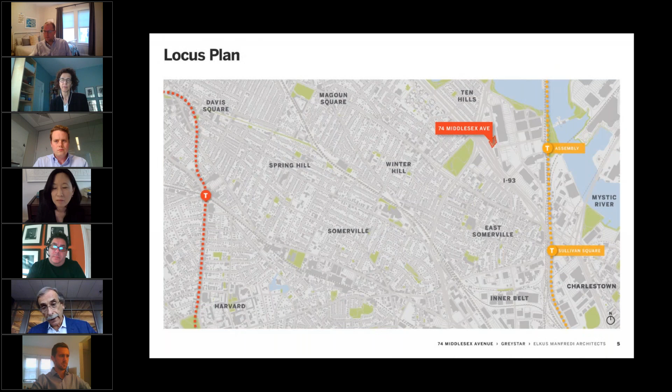I think you're all familiar with the site. 74 Middlesex Avenue is located in the Assembly Square Master Plan District, between Middlesex Avenue and I-93, on a site that is largely empty today with one small building. We believe it's an absolutely pivotal location in the heart of what continues to become a really quite exceptional new mixed-use district, a transit-oriented district, a prototype for work like this around the country.

You can see its proximity to the MBTA station, its proximity to East Somerville by access underneath I-93, and the advantages the site has in terms of visibility from 93, accessibility on Middlesex, as well as the opportunity to develop a front yard, a front lawn, a front park that will allow the building to present itself, but also to be a kind of convening space for the life science industry in Somerville.

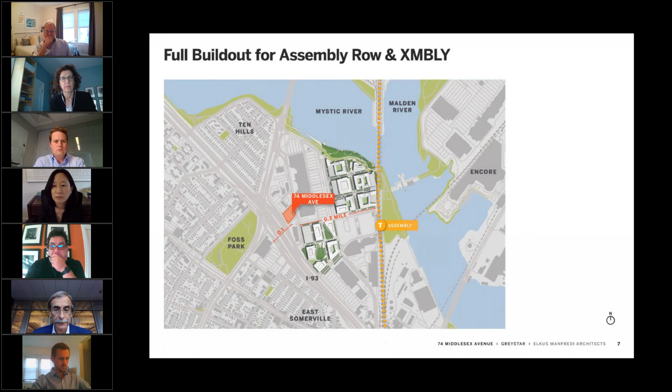We have studied our planning decisions in the context of Assembly Row, but also in the context of future proposed development that surrounds us. The advent of urban planning throughout this part of the city is transformational in terms of walkability, streetscape, and ground floor uses, and you'll see as we walk through the building that we've followed those same urban principles for transit-oriented design.

Giving you a little more context, you can see the 6-minute walk to the Assembly T station, and the 2-minute walk under I-93 that gets you to East Somerville on a site that...

David, this is Sarah Lewis. Because this is all to do with the master plan, which has already been approved, can I ask that you move through this quickly and get to the building and the civic space in more detail? Absolutely, absolutely. Thank you. You know where you are.

And so I won't belabor any of these connections. We are shaped by our context and the environment. So let's get to the building.

I'll start with the site. You can see the property line in a red dashed line, and you can see the civic space that Mikyoung will address, which spans both the public way and the private holding of the site itself, but will be designed as a single idea. I won't belabor these — you know the site, you know the importance of the connections, and you know what's on the site today.

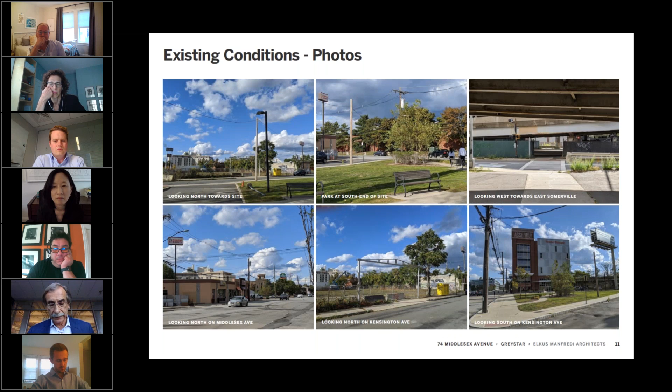So part one is the building, and the building proposal we're going to show you tonight is subject to the Assembly Square Mixed Use District. It's subject to the high-rise lab building requirements, and obviously subject to the requirements of public realm, specifically civic space.

Very simple comparison on the left, of the Assembly Square Mixed Use District Master Plan special permit decision that was the previous proponent — you can see that in column 3 from the left — and then adjacent to it, the proposed project.

I don't think there are any surprises here. There's no change in the lot area. The open space — none is required, 20% is provided. The civic space is 26%, and complies with the requirement. The floor area ratio is reduced from the previous project, and the overall building height is reduced from the previous project as well.

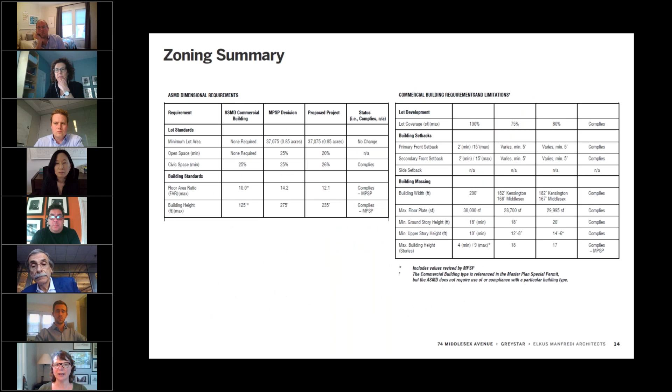If I may, just for the commission's edification, this project wouldn't be here if it weren't zoning compliant this evening. So I'm hoping we don't need to linger on the zoning compliance part of it as a discussion point.

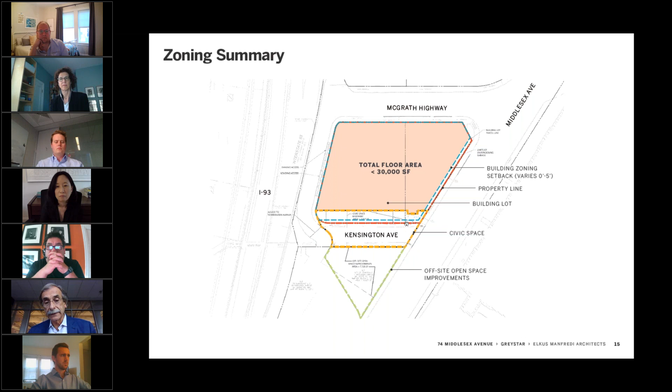We are located on Middlesex, between Middlesex Avenue and I-93, between McGrath Highway and Kensington Avenue. You can see the outline of the civic space, and the total floor area of the floor plates is less than 30,000 square feet. You can see where the building and property line coincide on the north and west, and we are within the property line on the east and south.

We'll start with massing options. You're looking at drawings we created almost half a year ago, studying massing options. I wanted to show you the original sketches that evolved into a series of conceptual designs.

The site footprint has 2 parallel sides and 2 non-parallel sides—north and south are parallel, east and west are not. This is a lab building, and the metrics of lab I'll discuss as we go through the floor plans, but functionally it has a center core, and optimally largely column-free space from that core to the perimeter. Multi-tenanted lab buildings rely on flexibility and diversity of different tenants and users.

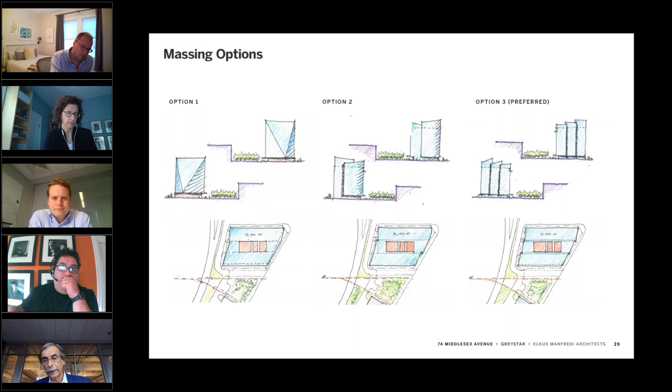So here are the 3 massing options as they evolved over time. You can see, looking to the southwest corner of the building, I-93 in the foreground along with the park space. That first option, which I've called chiseled.

The second option is a 2-part composition made up of gently curved spaces on the east and west, and the 3-part composition follows the geometry of the site while locking the massing into the footprint of the building, lifting it up 2 stories and separating ourselves visually from I-93.

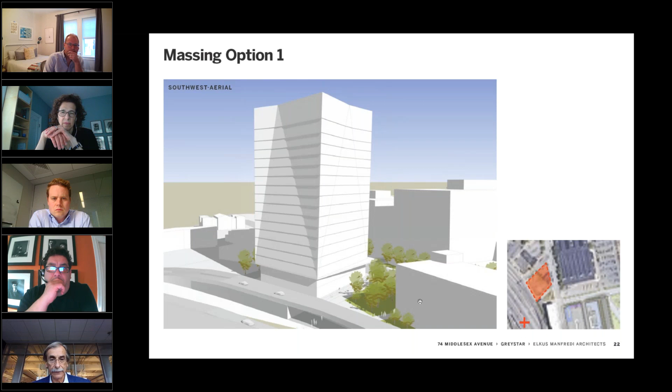I'll quickly show you a series of views of each of these 3 options. Option number 1 from the southeast with Middlesex in the foreground, option 1 from the southwest, and looking across I-93 with the green space in the foreground.

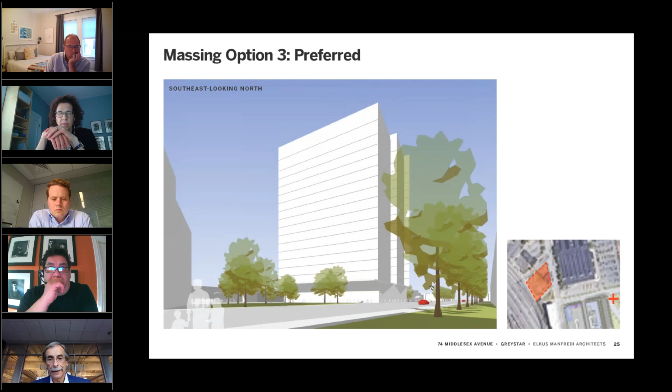Moving to the same views for option 2, Middlesex in the foreground, and then overlooking 93, and then the preferred option, option 3, which is the 3-part composition. You read it quite distinctly as you travel north on Middlesex, and very distinctly on the west side.

From the west, obviously I'm much higher than I-93, but the massing evolves out of the plan organization. As I started, massing option 3 is our preferred option. It's the one we've continued to evolve, and I'll show you that evolution.

Think about these little sketches: I-93, Middlesex and Kensington on the south, our civic space which spans across, and the park space you'll see in just a few moments. You see the footprint, the property line, and if I dropped a simple rectangle as an organizational frame onto that footprint...

You can see that we then pull the north rectangle to the east, pull the south rectangle to the west to conform to the site parameters, and then pull them apart a little bit. This is a very simple single-line sketch, but we separated them, creating this kind of reveal between the parts, which you'll see as it has evolved as well.

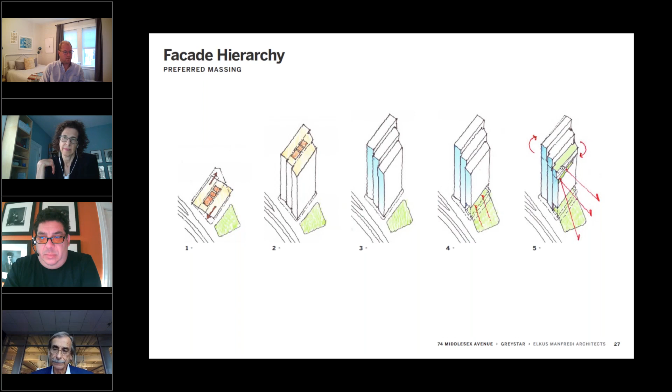We took that top, which already had profile, and rotated it—that's what those arrows mean—rotating it about a pivot point to accentuate the top of the building. And so this diagram...

This diagram shows you the primary planning and massing principles of the building: the separation into three parts, the lifting of the building at the base, and the creation of a base, a middle, and a top made up of the top occupiable floor and the mechanical floors of the building.

That brings us to our volume organization. You're looking at a view from Middlesex, looking northwest, so the 93 would be here, Middlesex in the foreground, and the organization of the building about a base, a middle, and that kind of rotated top.

You can also see the facets of those three—I'll call them volumes of space—and the separation between them, which you'll see in more detail shortly. We recognize the requirement that buildings of 5 or more stories should be divided into these three parts, and that those parts shouldn't shift up or down.

We don't have a lot of balconies and terraces. We have one very significant terrace up on the 16th floor of the building. It is within the envelope of the building, although it is outdoors, with a canopy that extends out a little bit beyond that edge.

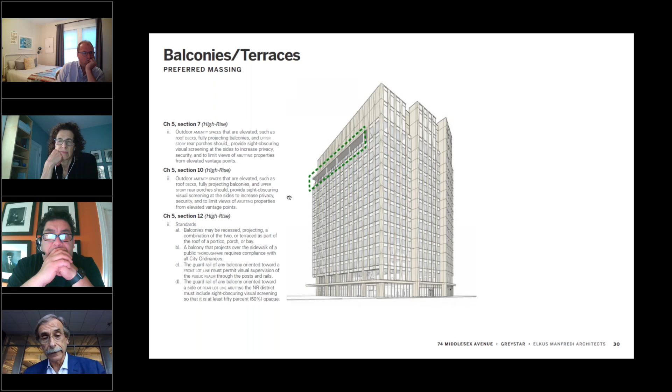Based on that preferred massing from the bottom up: 4 levels of parking with 350 parking spaces, then on the south side of the building a very tall ground floor giving us a significant lobby space, retail space along Middlesex, a tall second floor, and our typical floors are 3 through 15.

Sorry, that's the south side - that's the lobby, that's the park. And then a larger floor at the top, with our 2 mechanical floors above. You can see how that outdoor space is carved into the massing of the building.

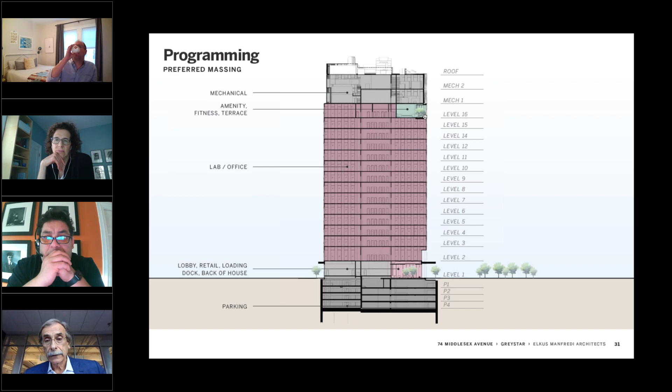As I said before, the building is 235 feet tall as measured by Somerville zoning. That ground floor is 24 feet, the second floor is 20. All of the typical middle floors are 15 feet, and then we are 20 feet at floor 16, and our 2 mechanical floors are 20 feet as well.

I'll take you through a couple of the floor plates and point out a few simple things. You can see the lobby, not at all oversized - and obviously this is a diagram, not really a plan - but the attitude is bringing both the geometry of the building to the park space and some of the geometry of the park space into the building.

The front door is at the southeast corner on Middlesex and Kensington. All of this southern edge is that 24 foot floor - the whole first floor is 24 feet floor to floor. You can see this is...

There's an entrance here on the southwest corner. This is our bicycle storage entrance into the core of the building. We have planned this with a through lobby.

Acknowledging that there's not a real destination yet on the opposite side of McGrath Highway, but anticipating that over time - remember back to that larger locus plan that we looked at - there will be. So that through lobby will give you a vista through the future development over time.

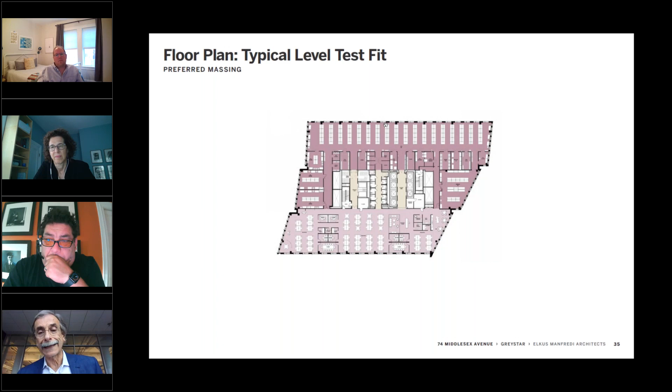I won't take you through every floor, I'll jump to 16. At the top floor of the building, we have leasable space, but we also have a series of common spaces for the tenants, including fitness, which is in this green color, and all of the support for it, a series of amenities, and that outdoor terrace, which is facing south.

And then the mechanical floors, you can see how that twist or pivot at the top of the building goes back and forth a little bit. You can see how that pivots, especially on the south, but maintains the perimeter of the building. We use those notches to expand in another way to define the top of the building.

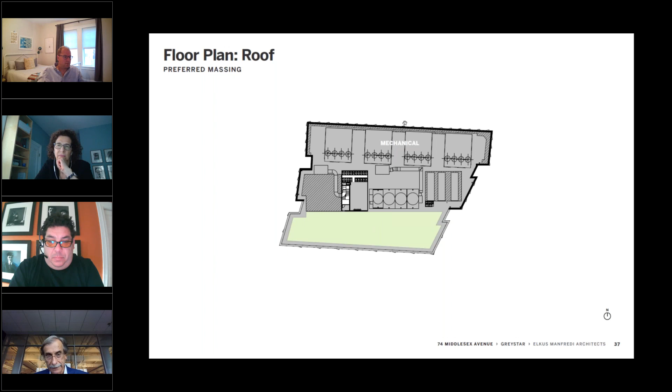And all of this, everything that's in gray, is not occupiable space. It's all of our air handling equipment and cooling towers, emergency generators, and this low roof, because this is stepping up. This low roof is a green roof.

I'll get to the facade design. The building is clad largely in metal and glass, and we propose to manipulate that metal, fold it in different ways, as you'll see in a moment, and obviously high performance. This is a LEED Platinum building, a high performance building envelope, and that metal is aluminum, so it will be a painted aluminum finish.

We looked at 3 facade options for the middle of the building. I'll come back to the base in a moment, but the middle of the building is obviously those floors from 3 to 15. Again, acknowledging and supportive of 2 things: your design requirements, but also the requirements to produce a very high performing building, meaning LEED Platinum, leads us to ratios where we want to have significant opaque envelope as well as transparent envelope.

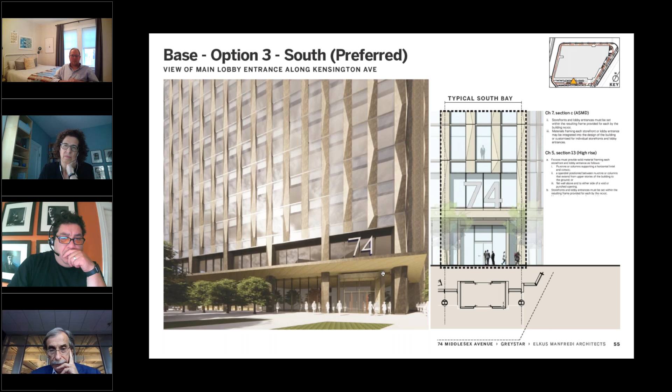The main entry option will again show the desire and the guidelines to frame an entrance. We've created a very simple frame with a side and a kind of lintel, and we investigated looking at the scale of it. Remember, this is 24 feet floor to floor, and we looked at it as kind of almost a half scale.

We looked at raising it up and creating a transom above, and then we looked at the larger scale of the frame, literally pushing that up to the underside of the canopy. This is our preferred version, given the scale of the building. The entrance is not overwhelming in terms of the scale of the building, but we wanted it to still be important. So it is, or we propose that it is, the full height to the underside of that canopy. I'm going to show you two different canopy options and our preference.

Our first option is to take that canopy that runs around the building and let it run all the way continuously - you see it here in this dashed line in the plan, continuous around the perimeter of the building. It provides weather protection to guests below, and also some mitigation for wind. You can see it wraps around the building.

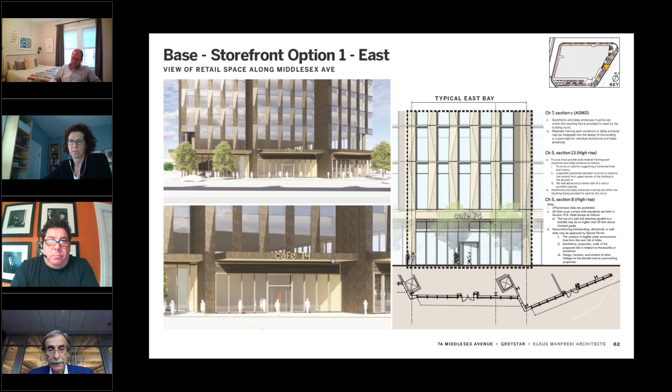Our storefront option really has to do with signage, creating a kind of lip on that canopy that puts signage here. Our reaction to this was that it was high, far from the guest, and not visible if you're under the canopy. Second option is in the transom of the glass.

The third option is actually under the canopy, visible in line with the fresh air louvers for those individual storefronts - so visible from the street, visible to the pedestrian, under the canopy, with pin-mounted letters that would be mounted on the frame or on the louvers for that fresh air. Again, that's our preferred option.

Then coming around at the base on the west and north side - this is the north side and this is the west side, which is our access to parking and our access to loading docks. Again, the separated canopies reinforce the geometry of the building, and again are used as wind mitigation, with this line wrapping around all four sides of the building.

The first one was actually connected. The second one is separated, and that's our preferred option.

Consistently, our signage then is our preferred option, which is on the louver of the fresh air, and these are real louvers here. In one case, fresh air to the retail. In this case, fresh air to our parking.

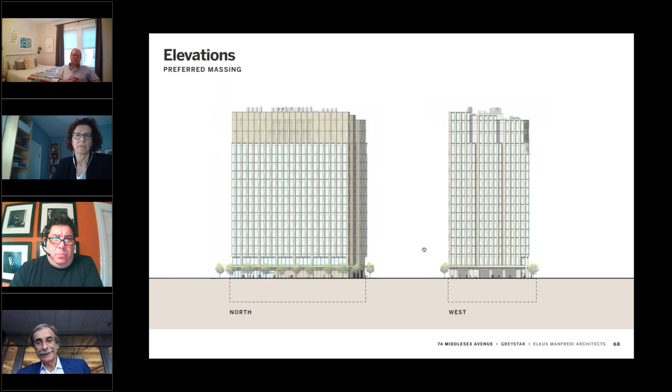Okay, I'll try to do this quickly - there's a lot of text there, but I assure you I'm going to do it very, very quickly. Some of those zoning compliance, obviously.

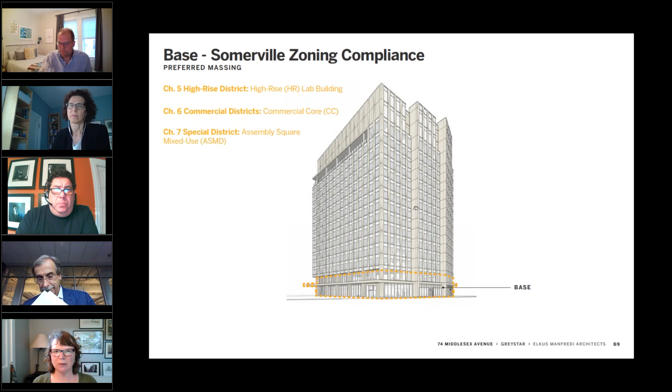David, we don't need to go through zoning compliance. Okay. And the presentation has been about an hour right now, and normally they're about 20 minutes. So I want to make sure that we don't get shortchanged on talking about the civic space. Okay, I'm going to go there right now as soon as we catch up.

My last slide, materiality. I just wanted to show you the parts and pieces. There's a granite base that wraps around just at the base of the glazing that runs around at the base of the building. The wood soffit on the underside of our canopy. The body of the building is metal panel and our vision glass.

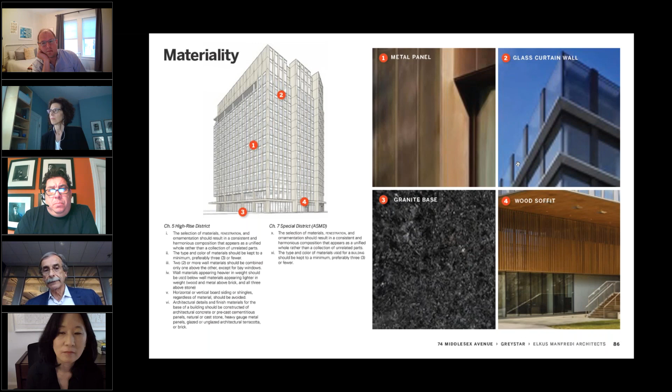And some long views that I'll click through very quickly. And our sustainability, as I said, we are LEED Platinum. I'll just point out the important data here that we're estimated to achieve 38% energy savings over ASHRAE standards. And you can see all of our commitment to air quality and acknowledging the site and its proximity to Route 93, our MERV pre-filters and filters in the building.

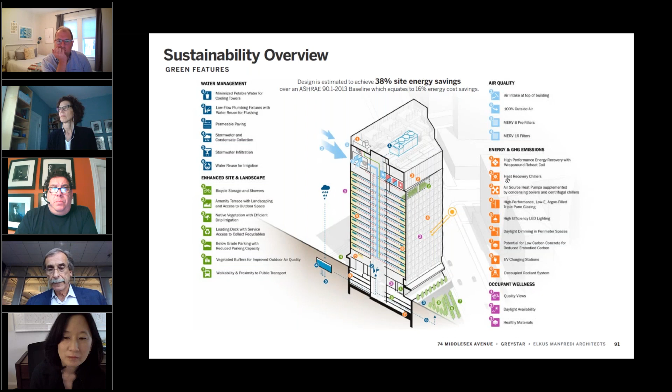And with that, now I am at my last slide, the sustainability scorecard. You can see that we have 81 points in our high achievable column. We will aspire to even more, but we've got plenty of backup in order to assure that we exceed the 80 requirement. And with that, I will stop.

And we can go directly to Mikyoung Kim, or we can stop, your preference. Should we go on? Roll on. Okay, Mikyoung, I will click for you.

Thank you, David. So you've seen this slide. I'm Mikyoung Kim, I'm a landscape architect working closely with Elkus Manfredi on this and David. So what we're going to start off by talking about in this first section of the presentation is just the area that you see in the red dotted line. So it's the building lot property line.

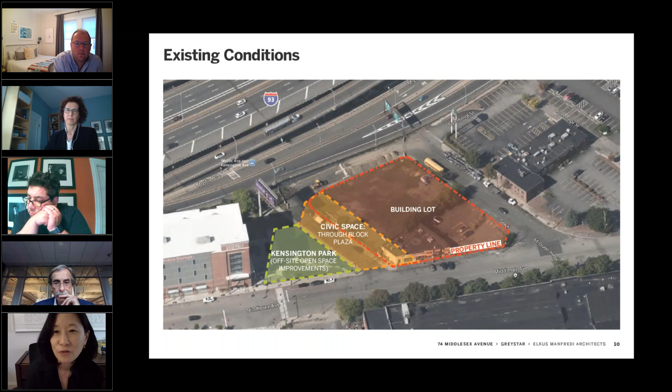And as David had mentioned, there was a real desire to create a kind of inside-outside relationship. So you'll see this green buffer that emerged through our process along Middlesex Avenue, and it kind of flows directly into the building itself. I think this idea of creating connectivity, and this - I think David called this site a kind of nexus - and so we're really interested in these kind of pink major lines that come through that talk about how pedestrians might move through the site.

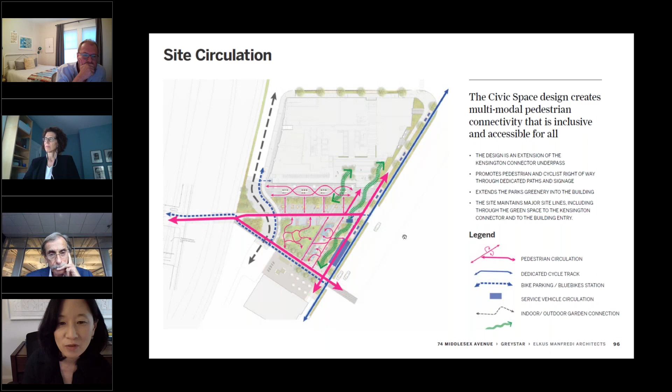Next slide, please. And so this is really the area of the site. Our work, the foundation of our work is based on the master plan requirements as well as the green scorecard requirements, and we're fully in compliance. You can see the site is very tight. Along Middlesex Avenue, there's a lot of green space with a retail outdoor seating area that corresponds with commercial and retail usage within the building itself.

There is outdoor seating, flexible seating that we're hoping is this place where both lab workers and office workers can meet with the community and meet there at all times of the day. You'll see, I'll point this out to you in the future, that you're protected by that kind of deep

canopy structure that David pointed out in the presentation. And then along Middlesex Avenue, we know that the city is developing a cycle track and pedestrian streetscape master plan for all of Middlesex Avenue. So we expect that we'll be coordinating that, but for now, we wanted to show our commitment to having a cycle track.

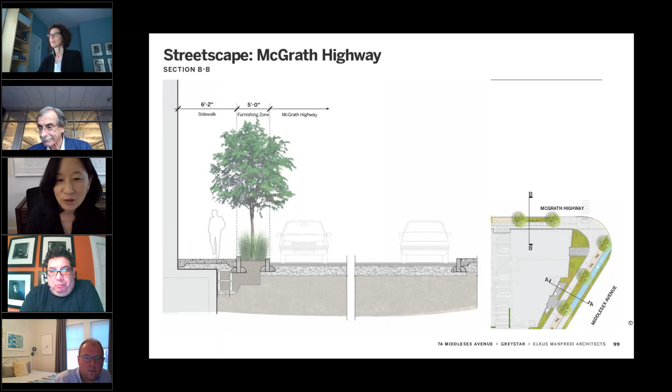Our aim is to create a really vibrant streetscape, and we have a commitment to use all native plants. Most of our trees are high value, and all of our trees are low VOC trees, to create all season interest and to really bring in perennials and ground cover in this area. Next slide, please.

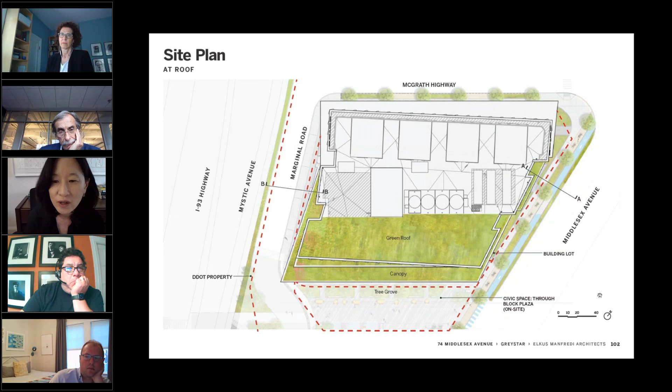As you can see, the site is very tight, so we were working with Sarah to make sure we're in compliance with the green scorecard, so that there is a green roof - David had shown that earlier - up on the top floor, and also a green canopy, which has 4.5 inches of soil depth and will be a sedum green roof, whereas the green roof on the roof is about 10 inches deep in soil depth, so we'll have a lot more flexibility on what kind of planting we can put up there.

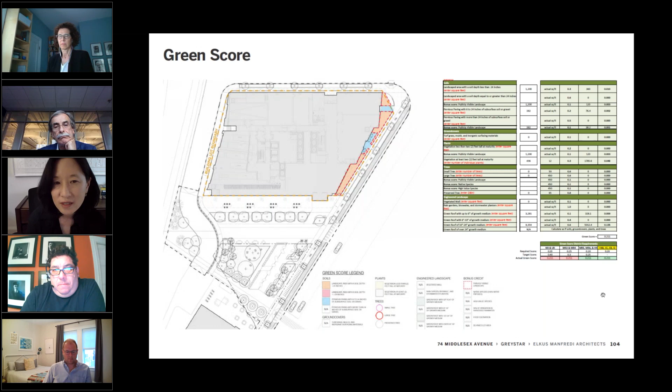I'm not going to go through this, Sarah, unless you feel like we need to, but really we submitted this last week. There's some tweaks to this presentation from our submission last week, and we will resubmit this, but all of the landscape is in compliance with the green scorecard, both at the ground floor, and then you'll see in the next slide on the roofscape. So you need all of these, on this very tight site, to be in compliance. I believe that's my last slide.

So I'll be presenting the civic park, the civic neighborhood park, after we discuss this piece of the building. And that concludes our building section.

Great, thank you. I'm going to actually ask the commission, would you like to discuss the building now or hear the civic space presentation first?

I say we should go with trying to, that's my opinion, go through the building presentation right now and then wait to see where we land on the civic space. I mean, it is 7 o'clock at this point, so let's give time to the building and the landscape component of that, and then see where we are for the civic space.

Okay. All right. Do you have any questions at this time for the team?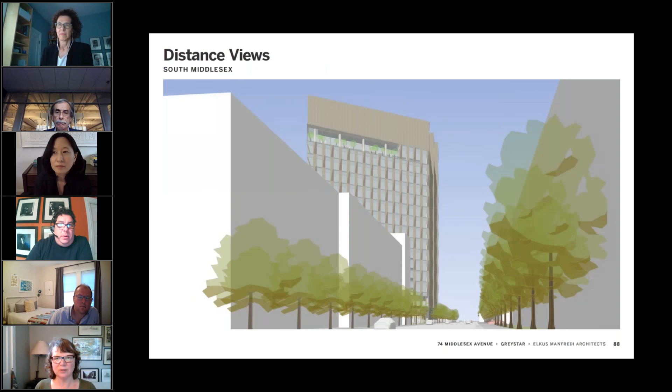Just to remind you, we do have to take votes on the preferred massing scheme, and as they've shown you, multiple options for the different pieces. I think we should probably vote on each of those, and then over the guidelines overall.

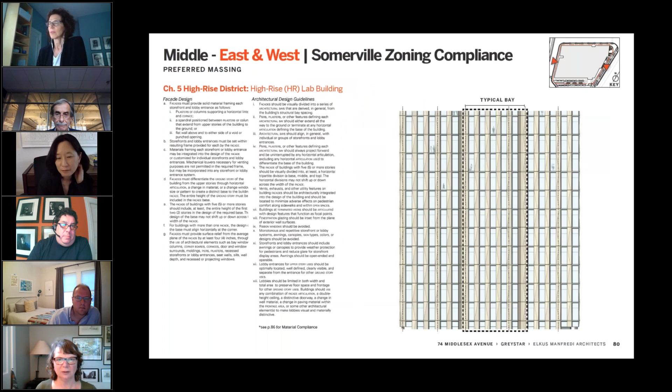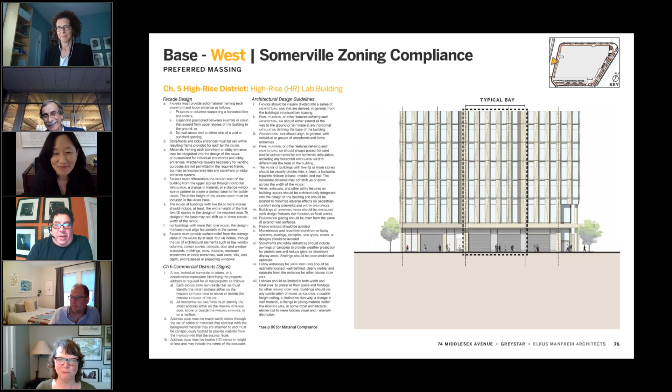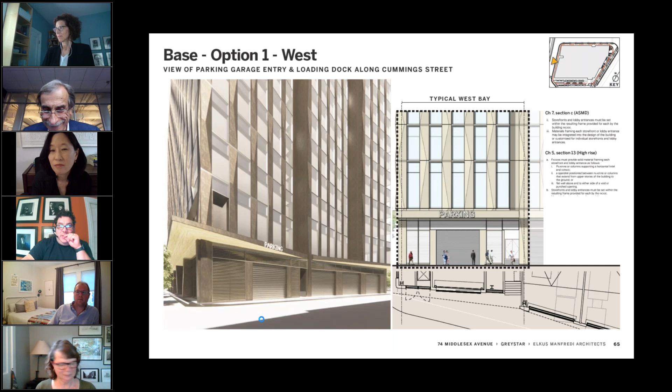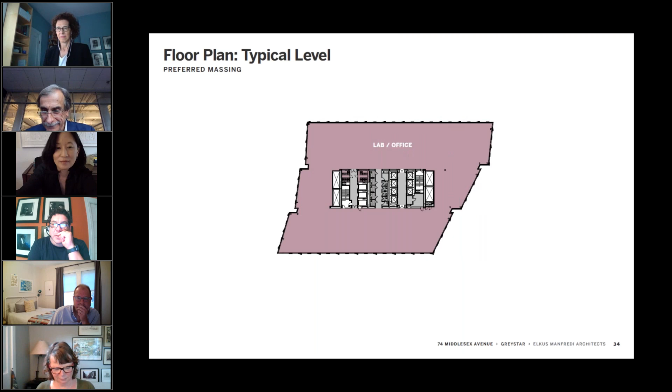David, could you go back to the 3 massing schemes? Start with slide 27, I think that would be a good start for the conversation. You can just type it in the prompt in the PDF, it should take you directly to the page. But maybe you have something different. It's not going there, but I'm almost there. But you had it, awesome.

I wanted to start on this as a conversation point, David, because I was initially very intrigued by the breaking of the massing in this option and the way the building was broken down. I understand this is a diagram and the beginning of an idea, but as you kept moving forward in the presentation, this stepping down became a challenge in the section and elevation to continue through, and it somewhat seemed to get lost.

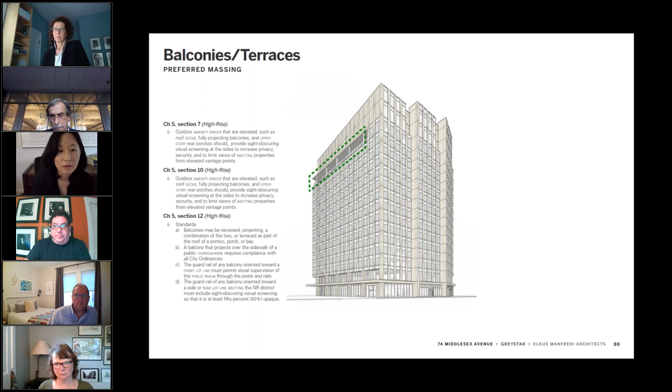If you go to the section on page 31, you can begin to see the building stepping begins to get lost because of the reality of the penthouse. I was also trying to figure out where the green space was located on the roof, whether it's on level 16 or on the roof where the solar panels are. It's right here.

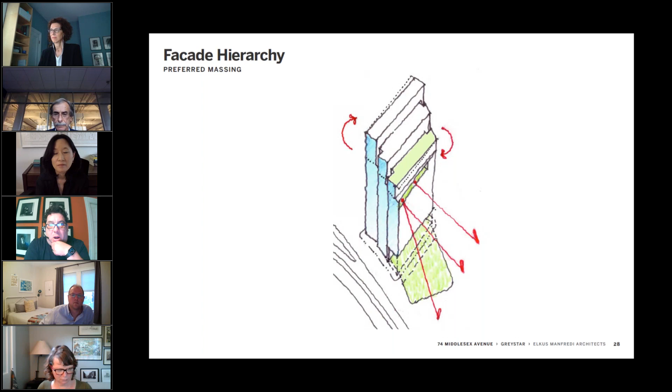So I was very intrigued by the massing of option 3, which is your preferred option, and one I really like from the massing you presented. But when you see images like that taken further, the hierarchy of the levels begins to get lost in the massing. I wanted to bring that forth to see if any of my colleagues felt the same way.

The observation of that loss seemed to me because at ground level it's very hard to perceive, and it's a perception you get perhaps when you're on 93 at a larger urban scale, where you begin to see how the building is being broken down. So I understand how you'd lose it at the pedestrian level and the urban level, but it was a very nice massing that I thought would have been nice for it to continue. I wanted to bring that as my first point of discussion, as I did like your facade hierarchy and your preferred option in massing.

Well, I'll just quickly respond. I don't disagree with you at all. The diagram is a diagram, and that was our goal. Of course, as you begin to lay out all the stuff you have to get up here, it didn't have the amount of difference between the steps that we had originally hoped for.

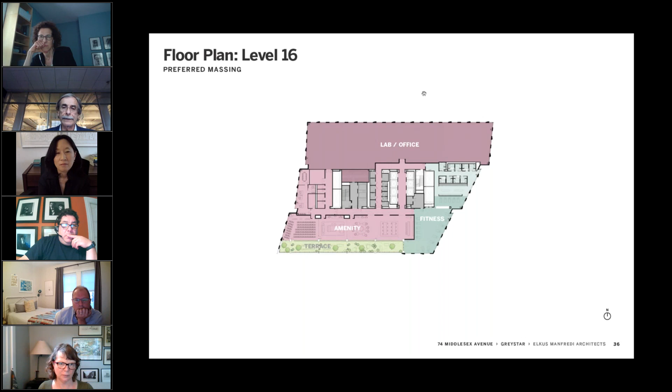And of course, some of this is - I'll take you here. The other thing about these buildings is that the core shell building provides all of the base building air, power, and emergency power. The tenants then, because they're often so different in what they do, bring ancillary equipment, so you're leaving space, and almost always it fills up. But I hear your point, and it may be that we - I don't know that we can push down, so maybe we have to pull up a little bit, but you make a good point.

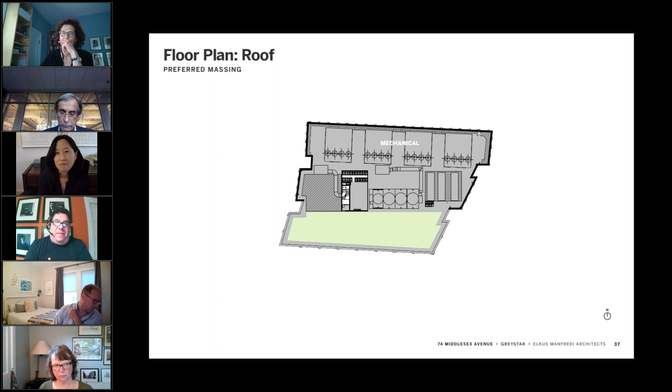Because it was intriguing. And when you look at the facade options you're providing - if I move to the facade options, I would tend to agree with your preferred option, now on slide 46, which is facade option 3. I do like the idea of the staggering component and the undulation of it, and I think it begins to work, and that rendering begins to show some of your original intent of breaking this mass. I think it's elegant in that.

So I know it's a diagram, I know it's a reality of what a penthouse is, and a reality of a lot of things, but I liked your initial approach, and it was very intriguing that you were really trying to break this lab building or penthouse to create this interesting crown that read differently, almost like 3 buildings colliding together.

It had some interesting readings to it, so I kind of like that. I don't know how you begin to introduce that again so it reads, but this reads well in the break of the 3 buildings as you were doing in a vertical way. You're doing it very elegantly in a horizontal way. Those components I liked a lot, and I wish the vertical articulation of it would have continued well.

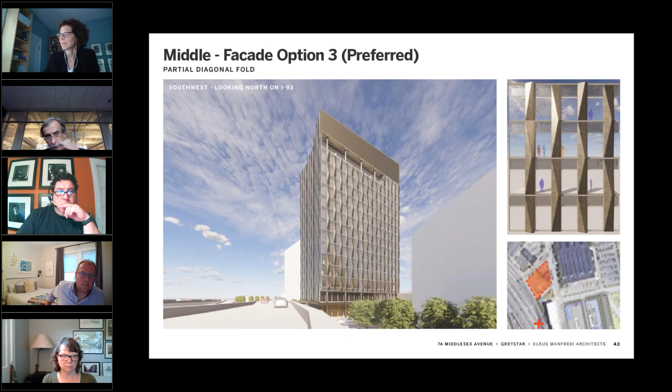And what you said about option 3, I actually think about option 1, which is that it becomes non-directional. Too even. I didn't feel that way about this, and one of the things I like, interested in your comment about making the building look bigger. One of the reasons I like this is because I think the staggered ganging of floors is more different, first of all, and I actually thought it didn't make it look bigger.

I think I did respond positively to option number 2. Part of that is just the way it's rendered, the shadows, giving a little more contrast and color. So I'm willing to guess that's just a rendering issue, because the pattern established in option 3, in real life, is going to have more variation that hopefully we're seeing in option 2. It's just a render issue. It pops a little more, and because it's rendered very brown overall, when the light is hitting and giving us a little white in that second option, I jump for it.

I like the way this is breaking down the larger facade. It seems cool, I do like this one as well. I like it a little less on the bookend pieces. I feel like here it's breaking down this large facade. When I move to this one, and the architects can tell me I'm wrong, but I feel like the massing itself is breaking down the building in a way that's interesting here. And when I apply that pattern to it, it feels a little busy to me.

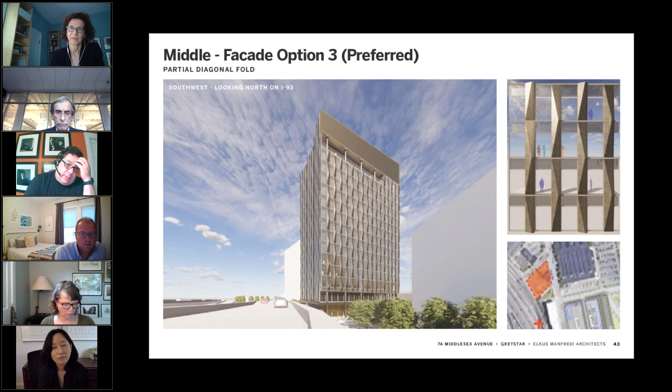I would agree with your statement on the rendering, and perhaps the rendering is not doing justification to the design. I think the subtleties between all of them is slight, and there's a little fuzziness to it, and I don't know whether that is creating that lack of commitment from us, like it's not crisp enough or developed enough for the judgment call. But from the explanation, the only reason I like option 3 is from understanding really what it would do. I'm not relying so much on the rendering, I'm relying on understanding the manipulation of the triangles, the catching of the lights, and the staggering. I can see that, and therefore I think I can imagine it better. But there is a slight discrepancy on the goldness of the renderings, this gold component that the renderings keep having.

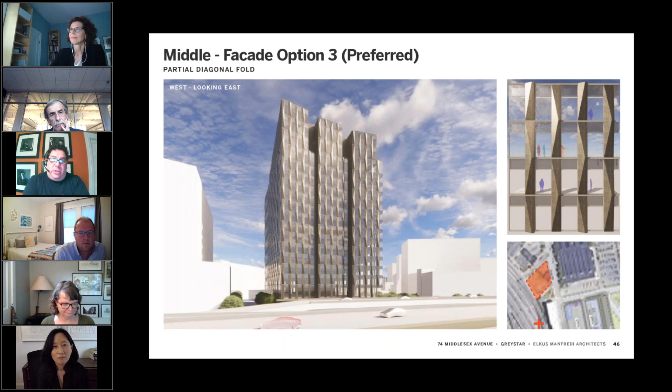That I don't know about, which leads to my discussion on the next piece, the penthouse options. I can't fully understand the shift of the materiality in the penthouse, and not understanding fully what the material is - I understand the diagram on the right, but I think the rendering perhaps is not doing full justice to what the materiality of the penthouse is. It's looking gold, maybe, I don't know if it's my screen, but it has this gold component to it, and I know David, you said it was a bronze color. I'm not understanding really the differences between all of them. I think it's just a materiality difference, so maybe the presentation of the different materials would be better to understand what the penthouse is, rather than relying so much on the renderings, because you flip through them and there's slight discrepancies that I can't really make up my mind on one or the other.

I do like your open terrace though, that open space between the penthouse and whatever floor. I do like this zipper open piece that breaks the building and brings people out into this green space and balcony space.

I will say this, the rendering of metallic metal in different facets deserves more sophistication. This is SketchUp rendering, so it's able to show multiples of different options. I would agree with whoever made the statement that I'm not sure it's doing it justice.

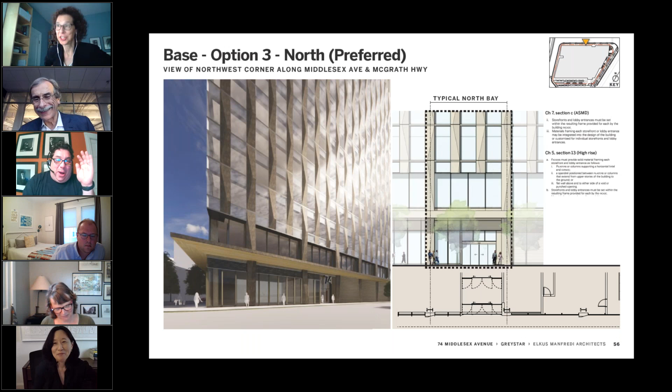Well, I bet it could go with the other one. So I would say that too, David, I think that base option 3 works. I like the idea that it's not segmented to just the entrance as you're presenting in option 2, but that it goes throughout, so it really creates more of an interesting base, and a higher reading of what this base is, which is elegant.

So you are presenting an option. I want to make sure I've got it, I realized I was just showing you that one. Yeah, no, that's not right. There you go.

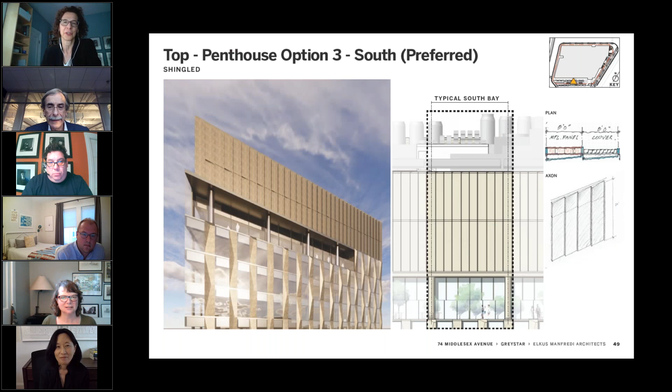I also like that shape coming down to the ground, whether it's option 2 or option 3. I don't know how it works with facade option 2, but I do think substantial columns coming through that register that 33-foot bay is very good. And the double scale that it gives.

These are a little more complex. Well, I think that's separating the canopy rather than letting it run all around. The running all around creates a belt that ties the bundle together too much. It doesn't let the bundle, each individual strand of the bundle, come to the ground.

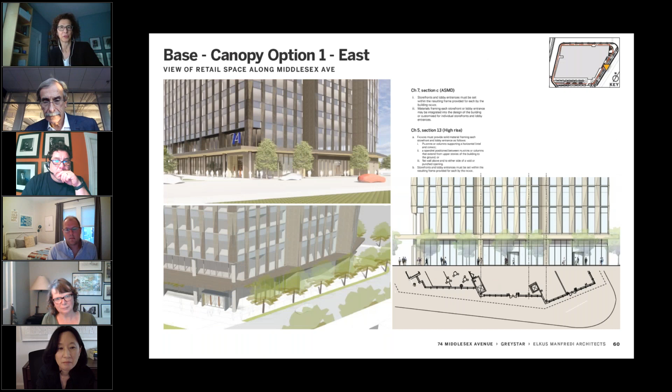So that's again to option, where is that? Canopy option 3. Yes, which I agree with also. And signage option, just get right to it, 3 makes the most sense also. I found the right place. Oh, you were really fast on that one.

Okay, do we have anything that shows the facade along the civic space at all? Or even the floor plan? I can definitely show you the floor plan, but I got the wrong option, but yes, that's along the civic space.

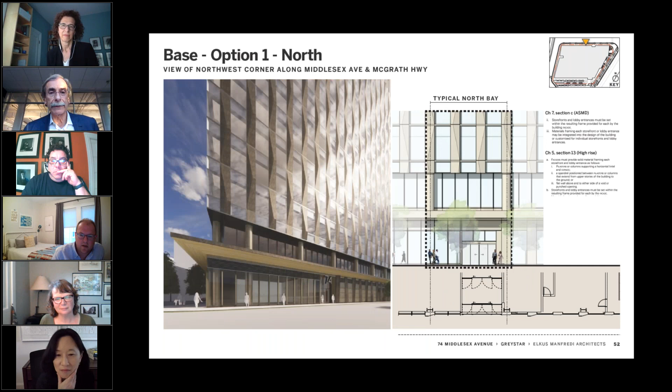I guess that's one thing, and maybe it's more of a floor plan issue that does concern me. I'm happy that we have the entry to the building fronting on the civic space. I think it's great, I think it activates that corner. But I question whether the bike room running parallel with the civic space is the best use for that, and whether it can help activate that civic space.

It seems very similar to the condition we have at the public storage, where we have an active cafe along the corner at Middlesex, and then a public space that's not used very often farther into the civic space. As we look at the civic space as a whole, I think those programs together haven't activated that park in the way it probably should have. And I'm worried that we're mirroring it on this building here.

I guess my response is a couple things. I hear what you're saying.

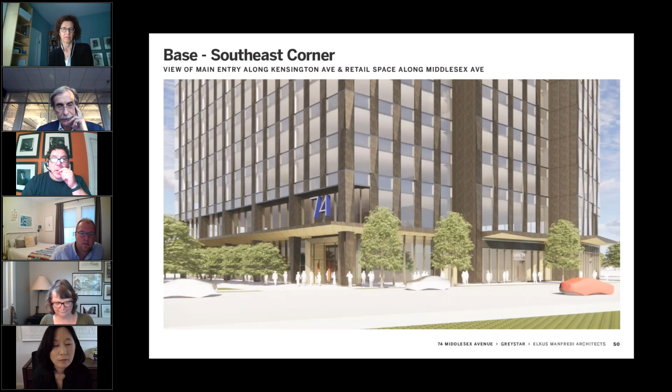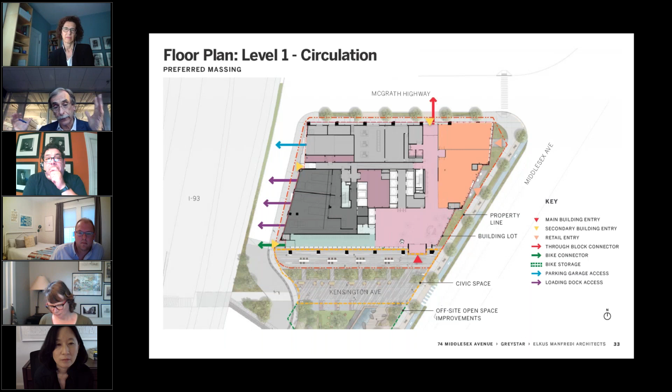We're celebrating bikes, and we're thinking about bikes as art objects, full of color, with the bike room full, and thinking about this wall, that far wall, as being a place for art, for a mural that could be the whole wall. We've actually done this before in the bike room, not nearly this scale, but the idea that you could literally take that wall and celebrate it. I think it would be worthwhile seeing your design intent on that, David.

I'll point out your lab building in Kendall Square on Binney Street has a bike storefront at the bottom, and I go through that daily since I'm doing a residential building across the street. There's not one, I see 2 bikes in there, and it's like this great space. Obviously you spent a lot of time thinking about it because it has very elegant components, similar to what you're saying here. But at times I almost think it's a missed opportunity, not so much for you, but for the owner and developer, because it's this ground space with glass, this beautiful thing, and nobody's using it. I think people are taking their bikes up to their lab space or putting them somewhere else, probably because they're riding on $3,000 bikes.

I would agree with what Andrew's saying, that there is a lost opportunity potentially. The idea of exploring the space - either A, can it move somewhere else so that it activates this a lot more, or B, what is it that we want it to become so that it's activated even when there's 2 bikes in there - so that whether there's art or some type of wall, it really creates this thing that communicates with the open space and the civic space outside, so it doesn't seem like a lost opportunity.

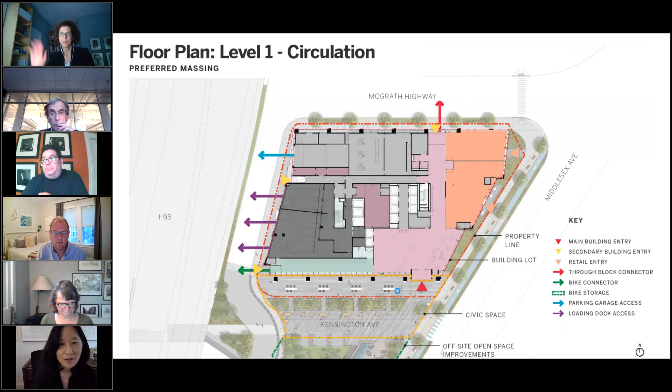There was, I can't remember which of you talked about the integration of the landscape and the building design, and I'd like to hear a little more about that. I think it might help for us to present the civic design, because that's really that diagonal line. I can wait for that, but please remind me if I forget to mention it when we go through that. Okay, that sounds good.

In the meantime, do we want to vote on some of the options before we move on? Yes.

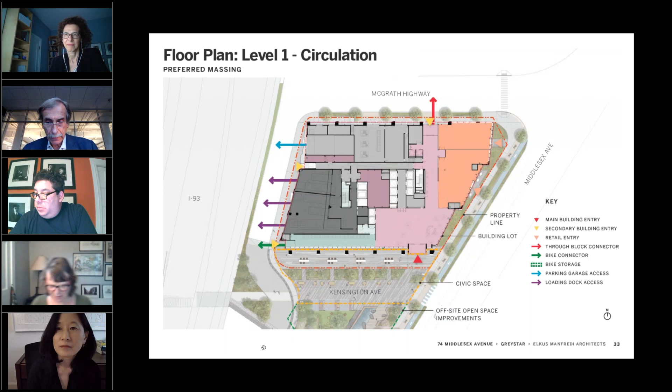So there's a lot to vote on here, I think. There is definitely a lot to vote on. I've been trying to take notes as we've gone along, and I'm hoping Andrew Graminsky in the background can help steer me on this. I think what I've generally heard is for the massing option, everybody prefers massing option 3.

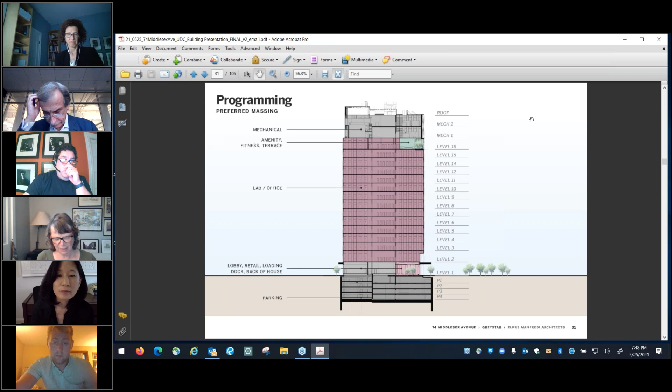For the facade option, there was some discussion, so I need some clarification on that. But I think we can vote on the massing option, the base option, and the canopy and signage options, all as option number 3.

The other piece I heard discussion about was the base option, tied to the facade option specifically, but there were pieces of that base option you were leaning towards, as in the idea that option 3 comes all the way down to the ground with the split canopy. David, can that be done with either facade option 3 or facade option 2? Yes, as a concept. So I think we're safe to vote on that also, maybe.

Just as a clarification, is there something you would like to see that shows more detail? Are we asking for more information, or are we voting on a facade option this evening? I don't think we're voting on the facade option this evening.

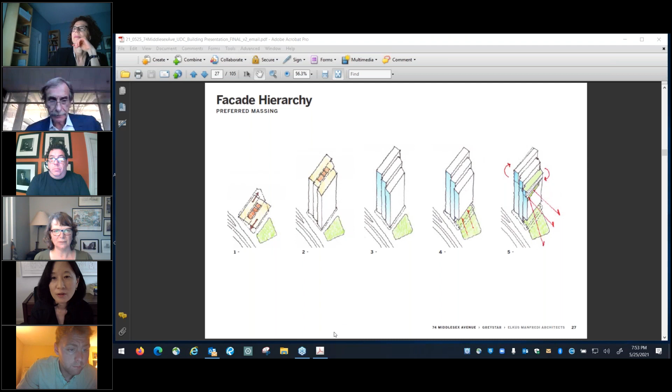I'm on mute. No, you're fine. Oh, I'm here now. Great, you just gave me it. Okay, thank you. Excellent. Can you see my screen? Yes, great.

So thanks very much, we're happy to be here. I have Emmett from my office here, who will also help answer any detailed questions, but I'm going to run through this. I believe Jen from Atelier 10 is here as well.

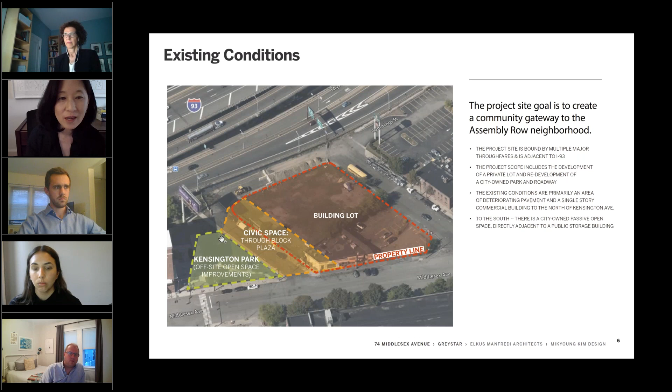You've seen this, but really the foundation of our work is to create an inclusive and multi-generational neighborhood park, as I said before, that complements the civic spaces that flank it on the other side of 93, as well as to the south of Middlesex. So essentially what I'll be talking about today, you see these different colored lines outlining the different property lines, but really what we're trying to do is make this feel like a cohesive place while making Kensington Park feel like a neighborhood destination. So that's really our goal.

This is flanked on Middlesex Avenue on one side and I-93 on the other. This is the park that Andrew mentioned earlier, next to the storage facility. It has outdoor seating adjacent to retail, so we'll be showing that in our designs. I'm not going to read through the first couple of text-heavy slides, we'll send a copy for you to review, but really it's about connectivity, about creating effective green buffers since we're constrained by the highway and Middlesex Avenue on the other side, making sure we're creating an accessible and inclusive landscape, and a flexible and programmed park.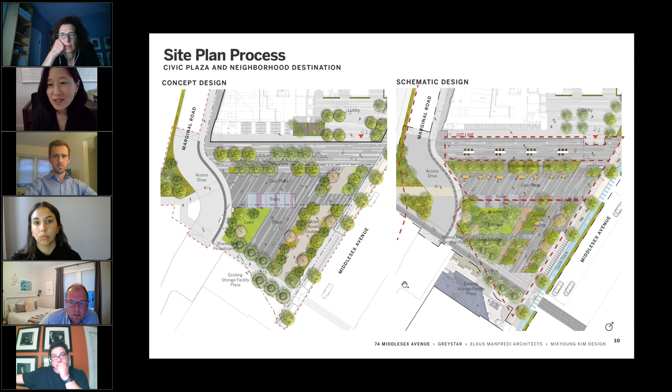There was continued concern about the closed nature of this, that it felt more like an office nook seating area, so we were asked - I think Louisa challenged us with how do you create, in a relatively small space, a park where the neighborhood would really want to come, where their kids would really want to come. We took that challenge seriously. This is an early perspective showing that garden nook area aligned to the new location of the front door, from the previous master plan where the front door was located over here.

I don't know if Jen is on this call. I'm on the call, yes. Are you able to? So maybe we can, Jen is from Atelier 10, and we've been working closely with her. We are really interested in using vegetative strategies to understand pollution mitigation. So I'm gonna pass this over to Jen.

Thanks. Hi all, I'm Jen. I work with Atelier 10 and I'm managing the sustainability consulting for this project, leading both the indoor health and well-being side, as well as looking at the outdoor environment and what the air quality is.

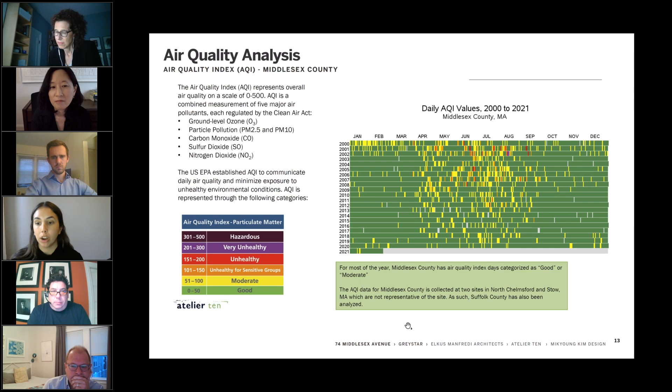As we're all aware, based on our site location, we have close proximity to a highway. We've done in-depth research and collaborated closely with the design team to figure out how we can incorporate strategies to make this a safe space for occupants to use. We started by looking at the EPA data for both Middlesex County and Suffolk County to understand what this looks like on a macro level. Overall, most of the year has good air quality, with some days being moderate or unhealthy.

But that data is a composite of different points around the city, some close to highways. With our proximity to the highway, there will be transportation-related air pollutants, abbreviated as TRAP. So we're focused on how the concentration of pollutants will impact our site and how we can improve air quality through different green infrastructure to mitigate the pollution.

We've been looking at several design strategies to incorporate into the civic space and landscape to reduce pollution concentration reaching our site. Some already work in our benefit, such as urban form and surface roughness in figure 1 - having a diversity of shapes and buildings mixes the air and avoids stagnant areas of pollution that you might see with uniform-sized buildings, like in a residential area.

We're also working to incorporate vegetated buffers and canopies within our project, which will help protect occupants using this outdoor space, as well as increase the distance from the pollution source to the occupant through the surface area of that vegetated buffer.

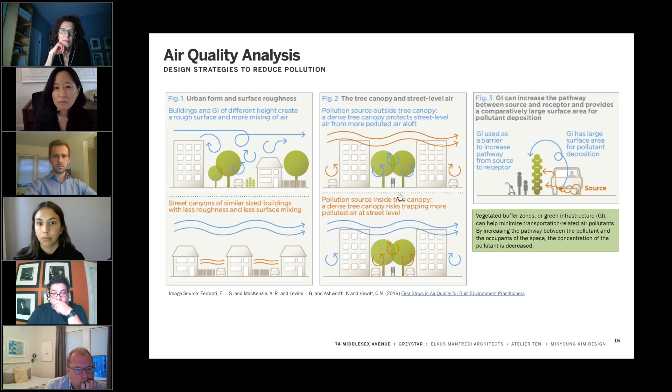In the meantime, we're working on adding vegetation barriers at least 20 feet or more in thickness, and making sure we select appropriate vegetation able to mitigate pollution throughout the year, without causing issues with pollen or VOCs through a regrettable substitution.

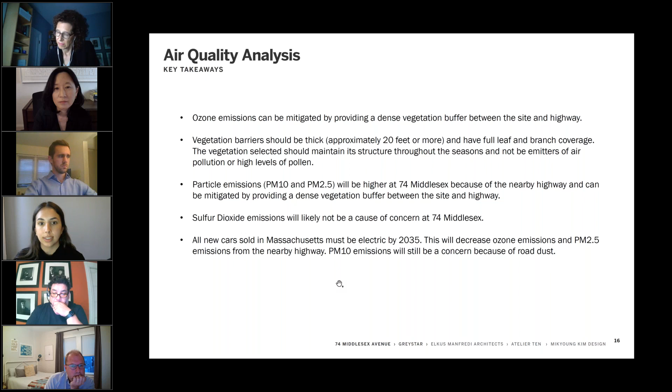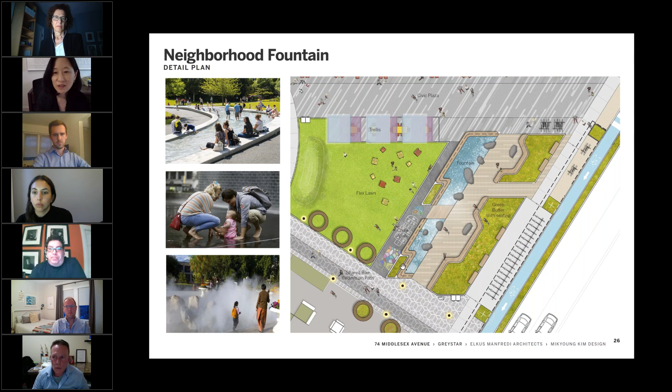We had long discussions about how does this site get used, and it really helped us shape the design for weekends and at night. I think there was a lot of concern with PSUF about whether this would become dead at night or during the weekends. So we wanted to do a study to show you could have weekend markets once a month and how this could become a multi-generation play space. We even scaled out - I don't have the drawing here - how you could put a temporary stage and have small scale performances.

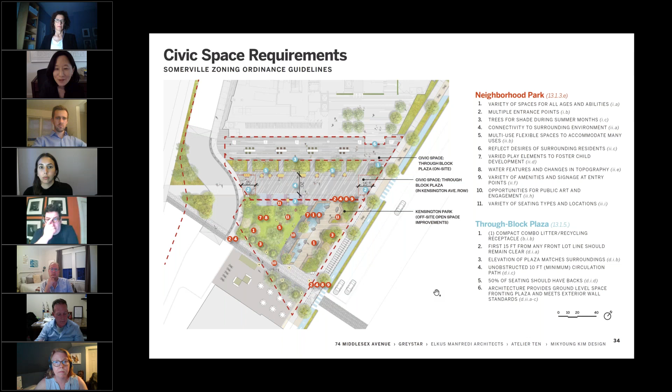The next few slides are really technical — I'll go through them quickly. We'll be submitting this so you can see them. You can see we're in compliance in our design with all the different elements, including drinking fountain, all the furnishings — this diagram shows all of those elements, based on the Somerville zoning ordinance guidelines. What you see in red is how our team has responded to the neighborhood park ordinances and the through block plaza ordinances. It's pretty detailed, so don't expect to read through it right now, but happy to answer any questions after.

And then again, with the understory planting - this isn't the only planting we're providing. We've just started design development, so as we move through this, we're happy to share that information with everybody.

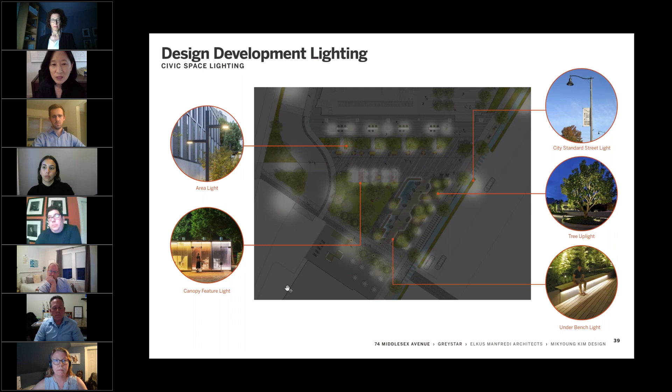And just to show you some beginnings of the selection of different furnishings, we will have big belly compacting recycling and litter receptacles. If you refer back to the compliance plan, you'll see where those are located, as well as drinking fountains. We're thinking that we could also include a little fountain for pets.

And then thinking about signage at the gateways to make sure that they are welcoming. One thing we started thinking about is maybe there's a kind of signage on the flooring, on the paving, as well as vertical signage throughout the project.

And so that's in a nutshell our plan that we're presenting today, and we welcome any questions or comments that you might have.

Yes, commissioners, if you have any questions, please feel free to ask. Also, since this is your third civic space that you're officially reviewing in a more detailed capacity, just making sure that the piece that you would be voting on is specific to the guidelines of the through block plaza, and then commenting, giving guidance on the project as a whole and the offsite improvements in the Kensington Park area.

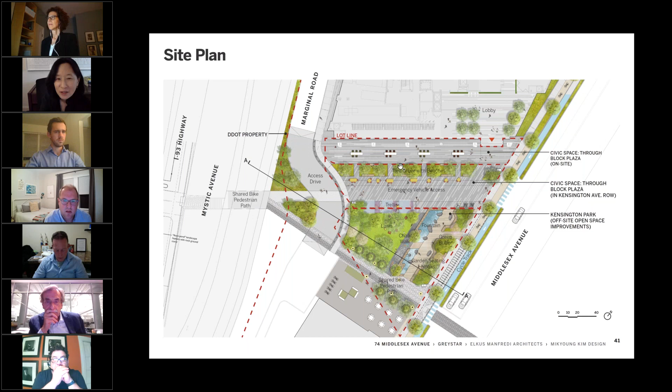It would be helpful to sort of see that canopy. I can't register it. Yeah, let me see. I don't know, it used to be on here as a dotted line. Let me check any of these plans. But pretty much, here it is. See this dotted line here?

Commissioner Arbaugh, is this something you'd be interested in seeing parts of the building presentation in relation to? No, I mean, I can see the dashed line now. You can see the dashed line, and this is why we've pulled the planter and the trees a little bit away, so that there is some egress and room for the tree to grow so it doesn't jam up against that canopy structure.

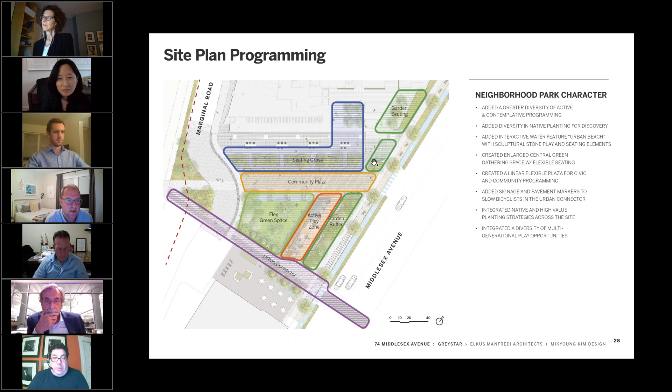I mean, I can accept that. I still feel like there's an opportunity to make that space feel more cohesive. It feels really walled off. And I like that it's going to attach into the building and relate to the paving — I think that's strong and great — but it is a significant chunk of the overall park and it feels private.

We are trying to comply with all of, I mean we really like it, the green score requirements. So if we take away one of these planters, then we're no longer in compliance and we'd have to come back and ask for a variance or some relief from that requirement. But to clarify, the green patches on the ground are not part of the green score tallying of the private building.

I think the Civic Plaza is also larger than 20 feet currently as well, so you could earn back a little bit by narrowing that, which might make the Kensington connector at the bottom feel a little more primary overall. We'll check that — I thought I triple checked this to make sure we made it as narrow as possible, but I'll definitely check that.

Yeah, I love the fountain, I think that's a really cool idea. One thing to note is that you guys are basically on top of, or very close to, the historic Middlesex Canal. It does seem like there's an opportunity in that you're proposing a linear water feature on top of a historic linear water feature — there seems like there could be an opportunity for connection there.

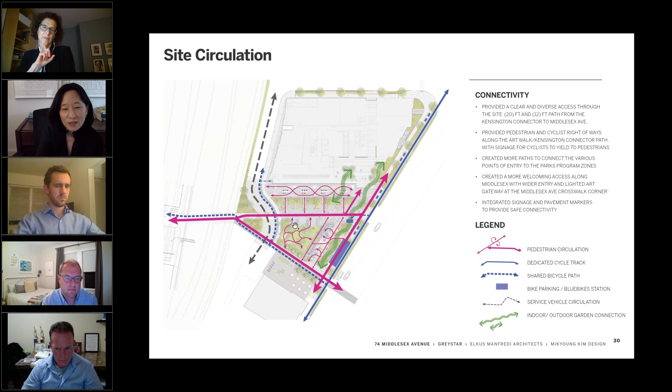I'm hesitant to move it over here. I totally understand what you're saying, that this is an important thoroughfare. I think it would change the use of that canopy structure from something where you're protected by green all around, a gathering place, rather than a place you would move through. But your comments bring up something interesting, like some kind of trellis structure as a gateway and entry point here, rather than moving this over there.

To build on that a little, I'm looking at the space between the public storage unit and your building as one park that includes the storage facility plaza. So I don't see that as a periphery, and I'm hoping you guys don't either. I see that as still really in the heart of this experience, extending between those two buildings, which does unfortunately include the storage facility plaza, which is not great.

Did I just lose? Sorry. Oh, sorry, I think the last thing too is just, well, I guess two more things, and then I'll shut up and let somebody else talk.

The city is doing a lot of work right now on the Kensington underpass, putting up murals and painting a gateway element this weekend. One thing that jumps out is the amount of color underneath there and how welcome it is, considering we're right next to the highway and it's a little bleh. So I'd encourage, maybe the trellis, or there's so many places where that color could be included in this, and I know you can run with that a thousand times.

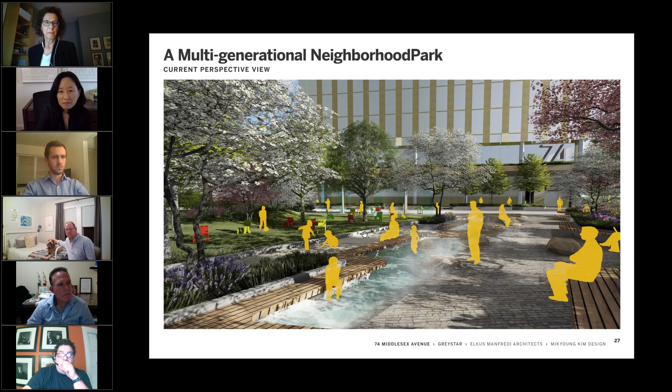I guess I only have a few comments to add. One is I have a feeling this is a much smaller place than I expected when I look at your renderings and see humans in it. The facade of the building seems very present, and I wouldn't have imagined that just looking at the plan. Next time you present this, I think it would be really helpful to see a section through the building and through to the storage building. There's some wonderful, important things you're doing with pollution mitigation and landform, and I'm curious what happens when you cut the section the other way.

You mean this way? Okay, yeah, we can definitely look at that, from the lab building to the storage building. I think we can definitely do that. Then we would see the canopies, imagine people occupying them, and get a better sense of the width of the block cut through.

This one, the Kensington Row. Yeah, exactly, it does seem wide to me, but the whole park's smaller than I expected. I would love to see it narrowed if possible, but we have to let emergency vehicles come through here. I'll check it once more to make sure we have minimized that. If it's any wider, it will definitely get narrower.

And then have a better understanding of the structures and how they help support creating spaces within spaces, and the connectivity across that way, even though there isn't a lot of movement in that direction. So those are my comments. I think the elements you have here are really quite wonderful.

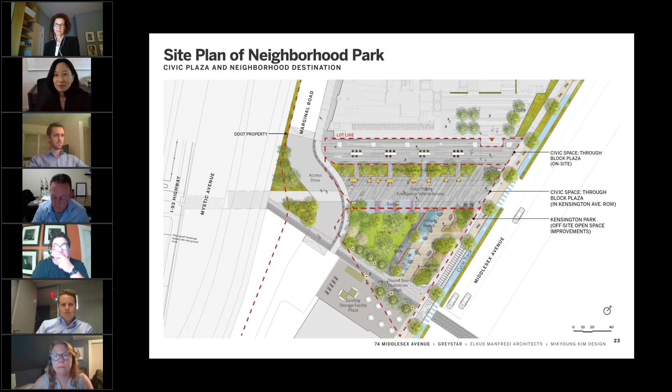Frank, if I could, I want to add relentless advocacy to the bumper sticker, because that's on all levels, from community to staff. Sarah, we took over a site that had an array of commitments - Platinum was the first big hoop, and then the development covenant, which is not insignificant, but the civic space was a major driver. We ended up not needing the underground rights, but the commitments above grade have been maintained. The city's been relentless in making sure every commitment and promise previously made is adhered to. I think the recent changes to add water and more activity space will be a driver for the community to want to be there. So I have to thank Sarah - this has been a complicated, long process, and we had to promise more than once that we're really going to build this.

Don't be afraid of the past - third developer's a charm, it's always the third developer that gets it. You'll have to make a new bumper sticker, and take the IN out of incompetence, so you'll say... I've forgotten the quote, immense competence.